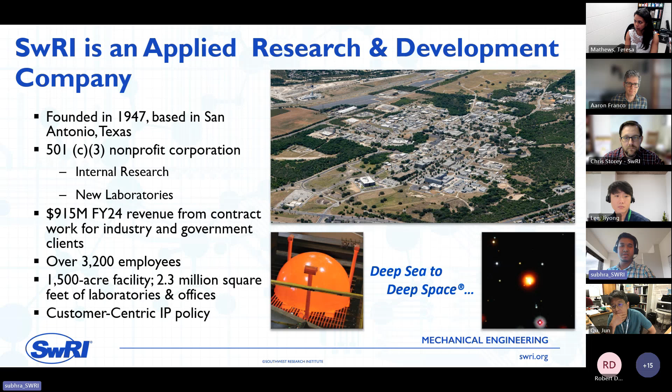We have over 3,200 employees, and we provide R&D to both government and private entities, which benefits everyone. Much like our motto, which is deep sea to deep space, Southwest Research Institute covers a wide array of topics, literally from deep sea to deep space, as you'll see through the course of this presentation.

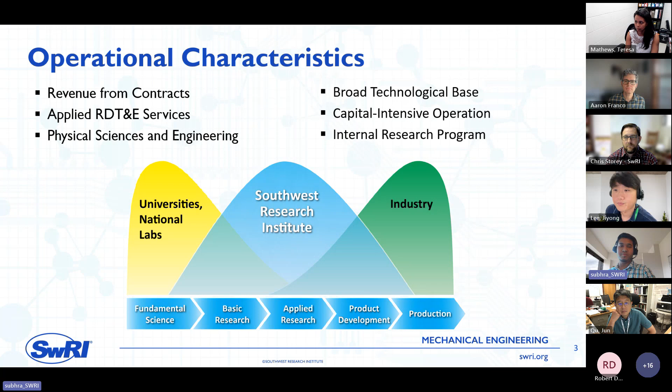I like to show this particular slide, which really portrays the niche area of Southwest Research Institute. Most universities or national labs specialize in fundamental or basic research, and industry focuses on production and product development. We come in between as a bridge between the national labs or universities or basic science and actual product development, where we carry out the bulk of this applied research.

I'm representing the machinery department, so let me give you a brief overview. We do applied research centered around rotating machinery and their associated systems, which has applications in industrial machinery, aviation, liquid propulsion, power generation, oil and gas. We have expertise covering a wide range of topics.

We can carry out techno-economic analysis as well as design technologies, demonstrate them, build them, and also mature the products for OEMs. Our department has more than 80 staff, with 6 labs and multiple test facilities. We also have capabilities for field testing.

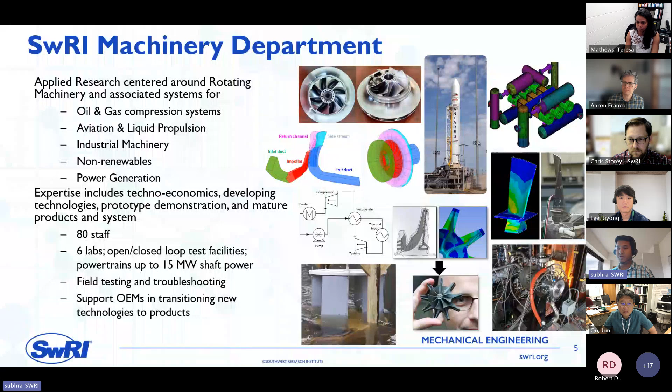This is just an overview of some of the facilities we have in our department, starting from a reciprocating compressor laboratory to a gas turbine laboratory to a centrifugal turbomachinery laboratory, as well as a multi-phase research facility. We are currently building a flammable gas test facility. Throughout all these facilities, we can operate with multiple operating fluids from air, carbon dioxide to hydrocarbons. We have a wide range of machineries from centrifugal pumps, compressors to reciprocating machines to gas turbine engines.

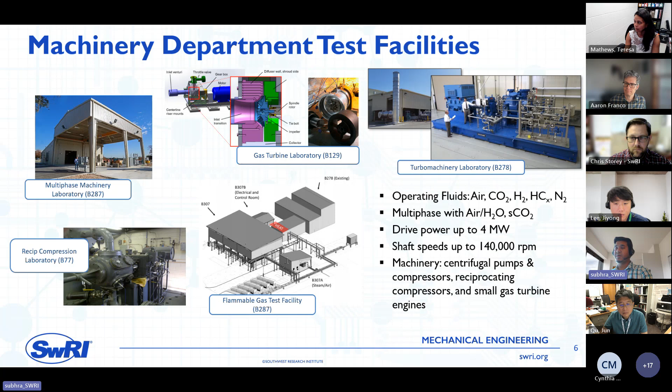Coming to the core capabilities and expertise relevant for TEAMER, we have extensive flow modeling as well as fluid structure interaction studies expertise. We can perform low to high fidelity CFD modeling as well as fluid structure interaction studies like flutter analysis, forced response analysis, or high cycle fatigue analysis.

To carry out this analysis, we have several capabilities, starting from several in-house codes to the open source NASA design codes that are available. We also have the entire suite of ANSYS, which can carry out this analysis, as well as AxStream, which is another software suite that helps in geometry generation and characterizing 1D performance.

We also have an in-house software called NPSS. SwRI is a consortium of this software, and we currently develop and are responsible for developing this software further. It has capabilities of system modeling, cycle design, as well as simple fluid thermal analysis.

Regarding the computational capabilities, we own more than 500 cores, which is not crazy high, but good enough for industrial purposes, and we can always grow more depending on necessity.

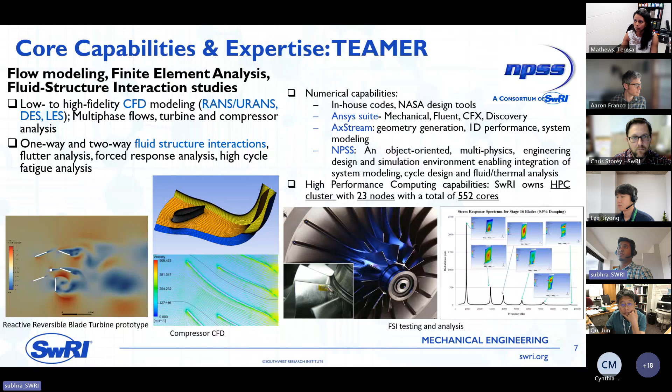Apart from the numerical modeling side, we also have extensive performance testing experience where we have carried out both field and laboratory testing. We have multiple loops, both open and closed loop, and gas turbines to carry out these measurements.

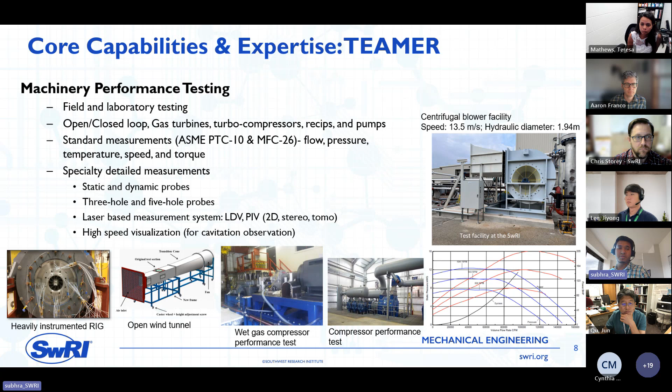We have standard ASME measurements for flow, pressure, temperature, speed, torque, anything required to completely characterize a turbo machine, as well as specialty measurements like multi-hole probes or laser-based measurement systems like laser Doppler velocimetry or particle image velocimetry, and also high-speed visualization, which can be used for cavitation studies.

One of the major USPs is the ability to create customized test setups for unique applications.

On the left is a test setup that was carried out for Aerojet Rocketdyne rotating detonation engine, and on the right we have one for space applications. So we have the expertise and experience to build custom test setups for different applications.

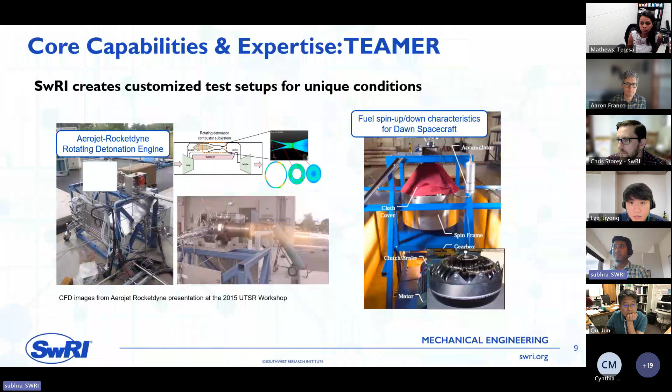To finally cap this up, I would like to showcase a recent toolset that SwRI developed, which we call Project Z. It analyzes microgrids by evaluating energy generation from different sources and also energy storage technologies to provide hourly energy balance for a microgrid. This can also be used for techno-economic analysis of individual technologies in both energy generation and storage.

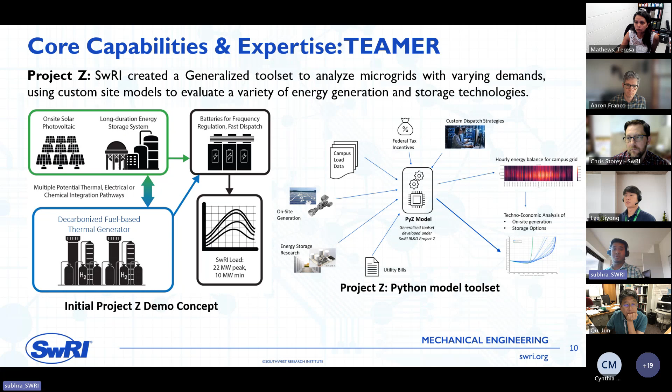Let me show some further recent works that we have carried out. Over the last couple of years, we had one TEAMER project where we carried out the numerical investigation for a reactive reversible blade turbine.

This was designed by Creektides Energy. Creektides Energy had an experimental data set for a single blade, and we validated a CFD model with that single blade result, and then built a numerical model for the different critical design parameters required for this sort of product.

Further on, we also have several other projects that we have worked on independently with both private companies as well as DOE.

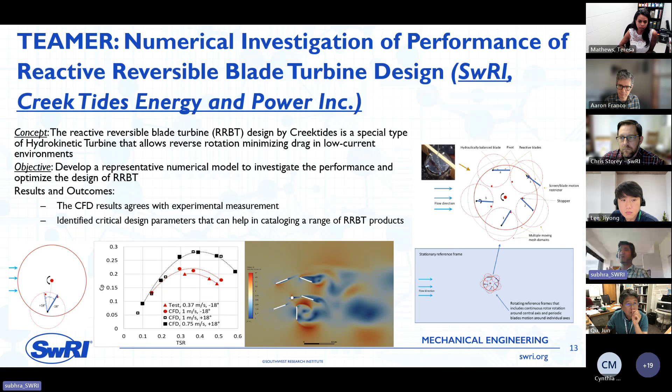This is called the Supercritical Transformational Electric Power project, which is kind of a flagship project using supercritical CO2 as the working fluid, and we are currently trying to build a 10 megawatt power plant. We have carried out both the design as well as fabrication of all the necessary aero and design components required for this power plant, and this is a project which is up and running with multiple industry and government partners.

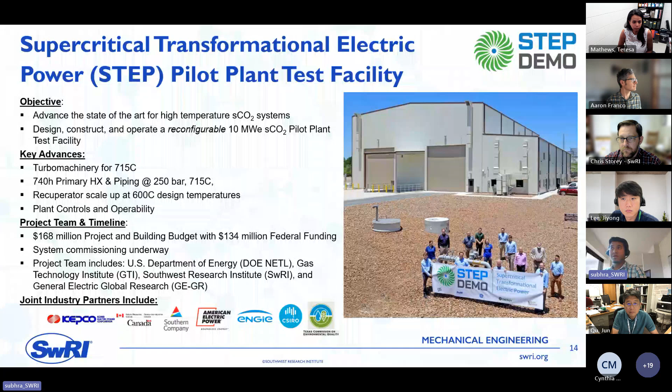Finally, to give a brief overview of some other projects, Southwest has partnered with several private industries as well as DOE offices to develop a turbo expander, integrally geared compander for Hanwha, as well as testing casing treatments for a Hanwha compressor, which increases the operating range, and also several other centrifugal compressor developments, including isothermal compression.

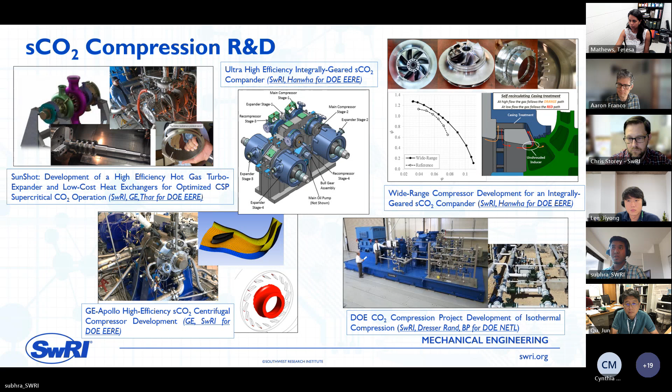We also have our footprint in several long duration energy storage projects, starting from pumped thermal energy storage to proper thermal energy storage, as well as pump hydro assessment studies and storage applications.

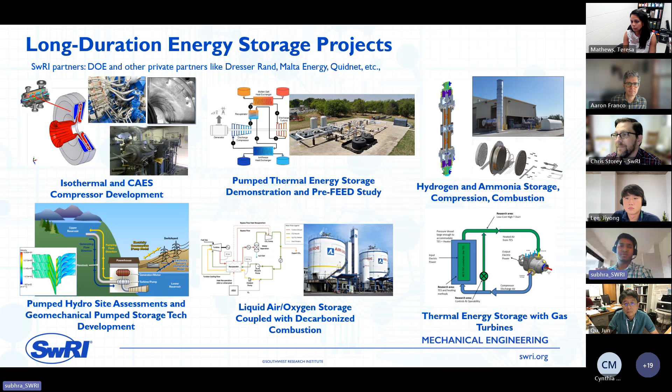Thank you. All right, so I gave a brief introduction. Again, Chris Storey, been here about 20 years, primarily on the pressure vessel side.

Just a few highlights of our department and facilities that would be applicable to this group. We have what we call the Heavy Article Test Facility, the HAT facility, in our building number 283, which has multiple cranes and large unencumbered floor space. Currently it's being used as a fabrication space, so we have plenty of subarc welders, TIG weld stations, and other manipulators inside for large items to be fabricated.

We deal with multiple metals, high-strength steels, some exotics, austenitic. That building also has a 100-ton crane inside, as well as a 20-foot cube pit capable of being flooded. As long as we put a jacket inside of it, the floor can take the loads due to the liquid.

On the lower left, the Ocean Simulation Labs is a 3-building complex, and when I say ocean simulation, it's more deep ocean, not surface or wave type tanks. We have 24 high pressure chambers capable of applying pressure to items. We do strain surveys, putting strain gauges on, even external to a feature, and exposing the strain gauge to pressure. We have protection and mitigation techniques so we can get accurate measurements from a component undergoing high stress environments.

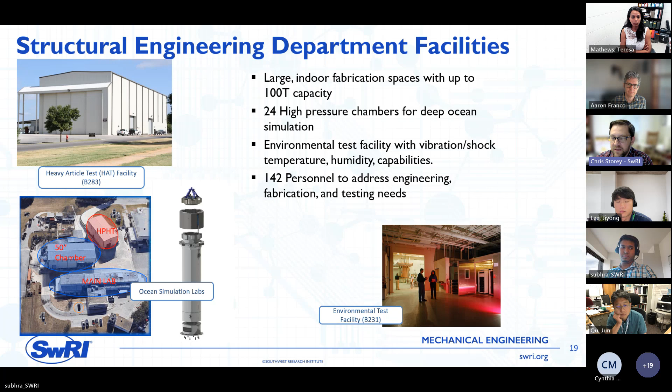Our department has about 140 plus people, a good mix of engineering staff, fabrication staff, and technicians for testing needs. Just some quick highlights as we go through.

We focus on deep ocean or even land-based pressure vessels, so plenty of folks are well-versed in the different design codes, in terms of ASME or naval ABS requirements, if those are sounding familiar.

One study we did a few years ago, probably borrowing from our department over there in Department 4, we ran a CFD for a shallow water rescue case. This was really interesting because it dealt with the rescue sub you saw on the previous page mating up to a distress sub in real shallow water. The forces involved actually aren't enough to hold a proper seal. This was one of the capabilities I wanted to show, dealing with shallow water wave hydrodynamic forces on large objects.

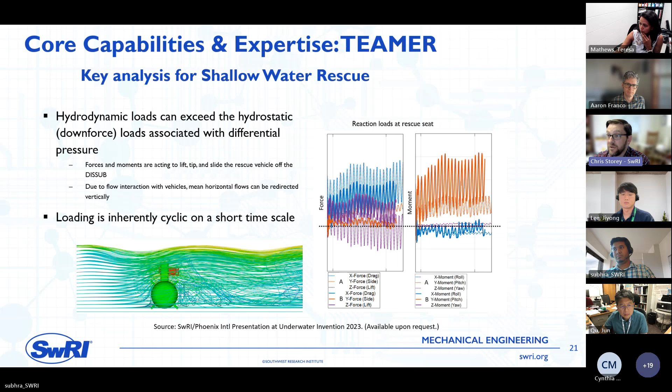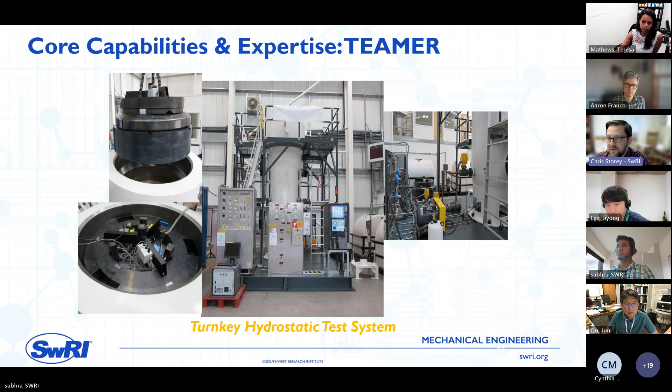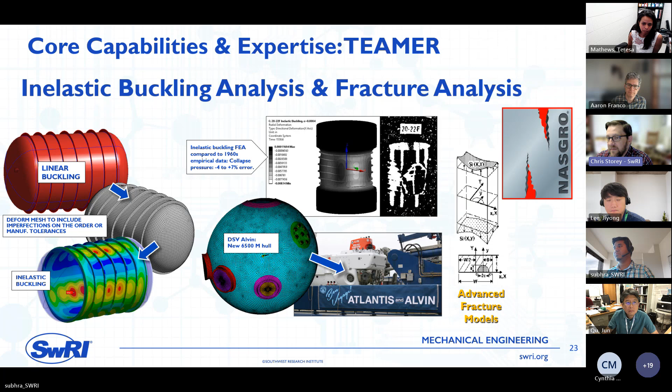On the lower right is the Alvin hull; we were involved with the personnel sphere replacement for that, and designed, fabricated, and tested the entire hull. On the far right, NASGRO is a proprietary software we provide for fracture analysis. It's been in use for several decades, and we run a licensed consortium.

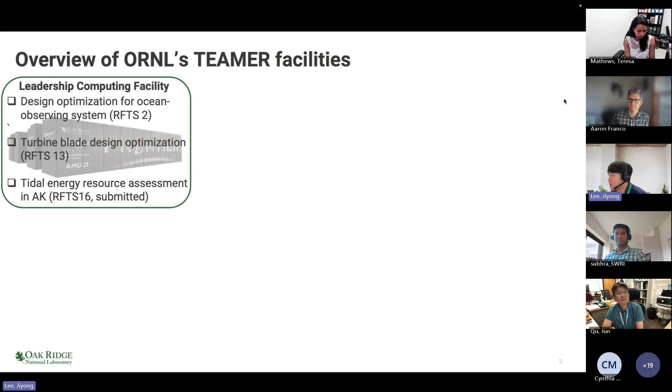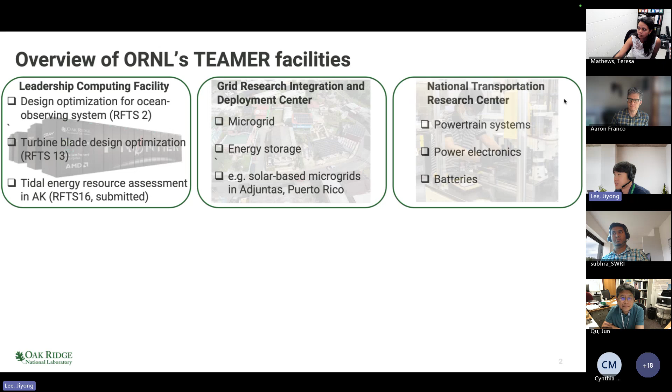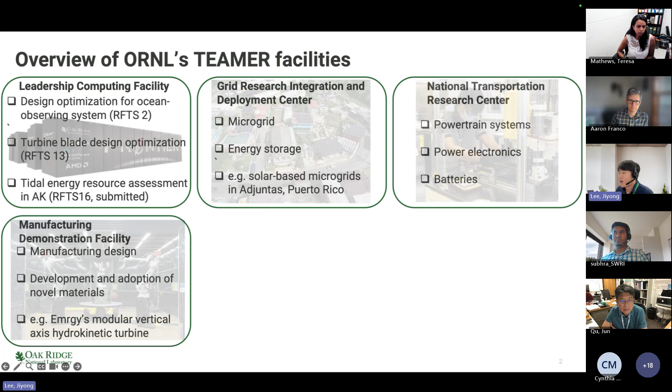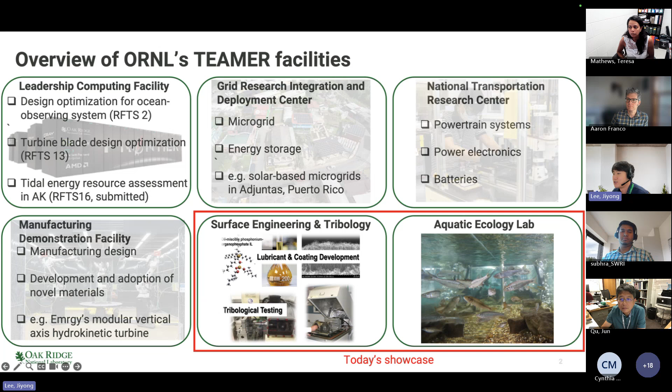Now, I will hand things over to Dr. Jun Qu and Dr. Terry Mathews, who will detail how their labs support testing and validation for marine energy technologies. Jun Qu, the floor is yours.

All right, thank you. We are glad to be part of TEAMER. ORNL has been doing tribology research since the 1980s, so it's been more than 40 years now. But we are new to TEAMER, so we're really excited about this.

For people outside tribology, they often think tribology research is primarily just doing rubbing tests to see the friction and wear. While that testing is necessary, the research truly goes beyond that. Whenever we encounter tribology issues, friction issues, wear issues, we always do tribological system analysis first. We need to understand the failure mechanism, the wear modes.

The technique we use is a combination of contact interface modeling and materials or surface characterization. With that, we can truly understand the interface phenomenon—what's going on, why it's not working, where the trouble source is. Then, after gaining the fundamental understanding, we can come up with proposals for different mitigations.

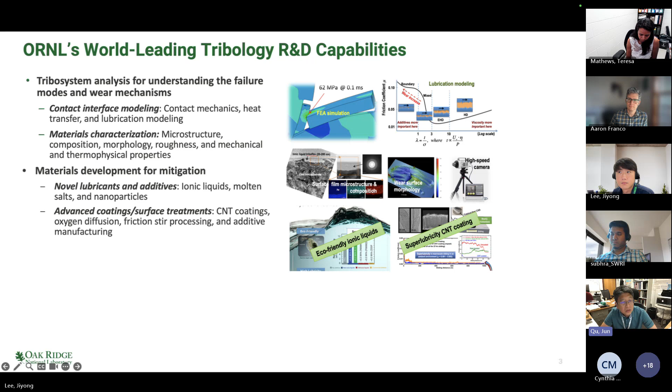Mitigations could be either from the design side or from the material side. Here at Oak Ridge, we have expertise in developing new materials, whether from the fluid side—new lubricants—or from the hardware side—new coatings, new surface treatments. Sometimes we bring new materials from both sides and seek synergy between the new lubricant and new coatings to solve the problem in a better way.

After selecting candidate materials, we do bench scale tribology testing. To make the testing meaningful, we have to match the wear modes between our lab testing and the actual application. We could simulate abrasive wear—either 2-body or 3-body abrasion—sliding wear, fretting wear, or we can simulate rolling contact fatigue, normally experienced by gearboxes and bearings.

Not only the wear mode, but also we need to do the best job we can to simulate operating conditions using our tribometers—controlling the gas environment, temperature, load, speed, and also the lubrication regime.

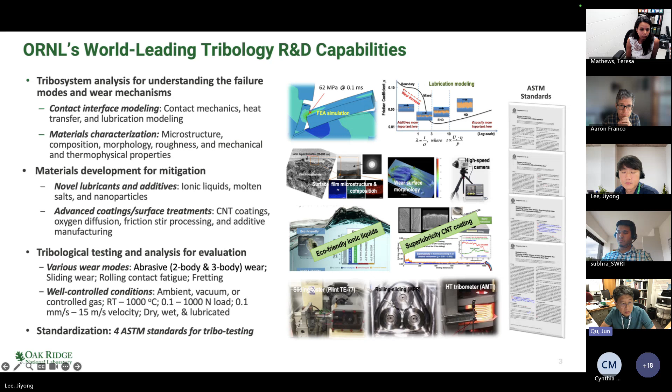And we constantly work with ASTM to establish new standards for tribo testing. Over the years, we've already established 4 of them, and they are widely used in the industry.

Then after testing, the job is not done yet. We have to understand why the new materials either work better or worse compared to the conventional. This comes from fundamental investigation through surface characterization, which ORNL has the best facility for. We do a lot of things including surface topography, roughness, and surface energy measurement, and also mechanical properties like hardness and modulus, and of course microstructure and composition analysis using SEM, TEM, XPS. Then with the combination of that information from the surface characterization, we can understand the rationale.

What's the next step? Whether the mitigation we propose truly outperforms the conventional, and how do we improve further. So that's the strategy we normally take.

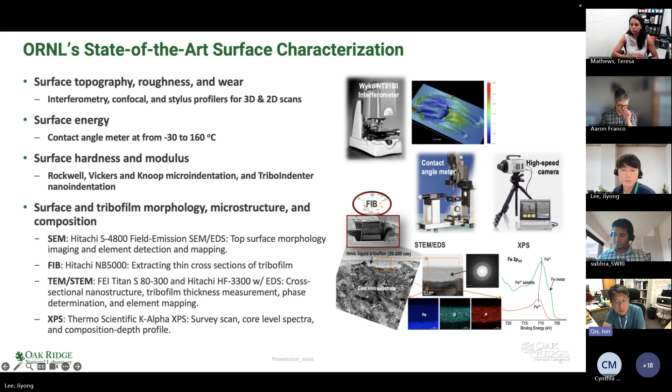Quickly, an example success story from the last few years. We've been developing eco-friendly lubricants since 2018, and in the last few years, one focused application has been marine energy, specifically tidal turbomachinery. That contains a gearbox lubricated by gear oil, but the current gear oils are toxic to the environment. So we are trying to develop a new environmentally friendly lubricant for the marine turbine.

First, we worked with the SwRI team from Sandia to gain understanding of the gearbox gear oil requirements from both the tribological and environmental perspective. Then we worked with in-house chemists to synthesize new lubricant additives. We conducted tribo testing and surface characterization to downselect the top performers. Then we worked with Terry's group in the Aquatic Ecology lab to conduct marine toxicity and biodegradability tests. With those results, we identified the best lubricant candidate.

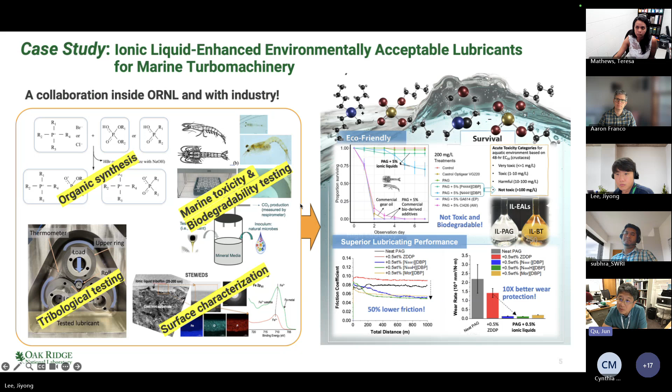Hi, thanks. My name is Terry Mathews, and I am the director of ORNL's Aquatic Ecology Lab. ORNL has a long history of aquatics research dating back almost to the inception of the lab in the 1940s. I've been at the lab for 16 years, and with a degree in oceanography, I'm going to make the case that despite being located in Tennessee, the Aquatic Ecology Lab has some unique attributes that make it well suited for marine energy research.

The Aquatics Lab at ORNL is a unique aquatic research facility located at Oak Ridge National Lab in Oak Ridge, Tennessee. It's one of the few aquatic research facilities in the region and includes 9,000 square feet of floor space consisting of flowing stream mesocosms, banks of aquaria, and large tanks for various aquatic studies. Within the facility are analytical, bioindicator, and toxicity testing laboratories that Jun just mentioned.

With the analytical laboratories, we could measure things like metals with ICP-MS, HPLC. Basically in-house, we can look at water quality issues. Then bioindicator work looks at the health of different organisms, and toxicity testing, as Jun mentioned, looks at the impacts of different technologies and chemicals when they enter the marine environment.

Adjacent to the facility are 6 quarter-acre research ponds and 2 nearby treatment ponds that can also be used for research. The facility uses a state-of-the-art water treatment system to bring dechlorinated water to the experimental tanks and mesocosms, which can be used for algal, invertebrate, and fish studies. We also have the capability to pump natural stream water from local streams into our facility and conduct experiments which add chemicals or contaminants into flow-through systems, because of a state-of-the-art water treatment facility which receives our water after it flows through our tanks.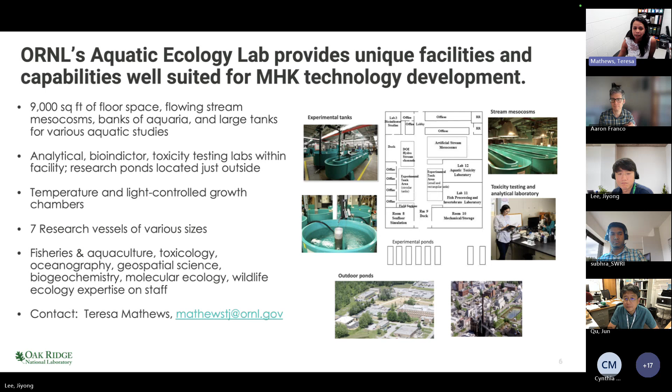We just celebrated the 40th anniversary of our long-term biological monitoring program in the Aquatics Lab, focused on understanding how DOE activities are impacting aquatic biodiversity. A key focus of this program has been species detection and quantification, which is one of the key ecological focus areas for marine technology development. Here I'm going to highlight three partnerships with industry partners where we've developed technologies for species detection using novel technologies that may be of interest to the marine energy community.

Traditional monitoring includes just going out and listening for birds, and if you work at a government lab, that's usually between the hours of 8 and 5. A lot of these birds don't call at those hours, so we've developed techniques that allow for the long-term deployment of acoustic monitors.

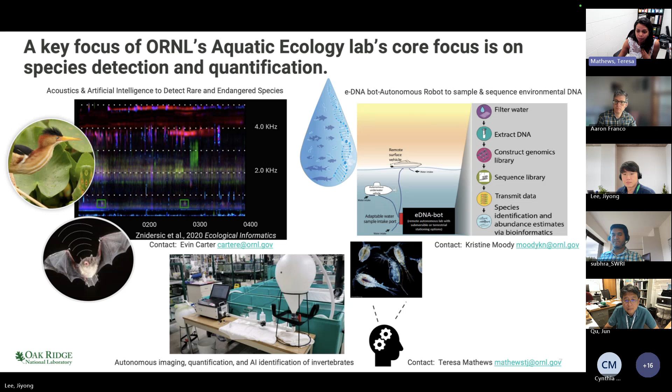But this is actually very time consuming, and the skills that you need to identify these things down to species is an art form that is quickly being lost. So through things like the eDNA-bot, which uses genomics data, and things like imaging and machine learning, we can increase our throughput of sampling in areas and over periods of time that we wouldn't be able to do using traditional monitoring. If you're interested to hear more about that, my email address is located at the bottom of this slide. So here are two examples.

So another key focus of the Aquatic Ecology Lab is on examining water quality and risk. Jun mentioned this collaboration that we have looking at the toxicity and biodegradability of lubricants—this was another collaboration with industry. The Aquatic Toxicology Lab is equipped with all of the standard aquatic ecology and toxicology equipment to look at the health of organisms over time.

In the example that Jun had mentioned, we looked at the toxicity of novel chemicals, novel lubricants that he was designing in the lab. And so we were able to look at what are the impacts on marine organisms.

One of the other metrics for whether a lubricant or another contaminant is eco-friendly is how quickly it degrades in the environment. So we looked at the biodegradability of these compounds in chambers by putting an inoculum of bacteria, a microbial community, into the chambers, and then looking at how quickly the microbes can degrade that material. In this way, we can use standard methods, ASTM or EPA methods, to look at these things, or we can develop new methods as we do in the lab routinely.

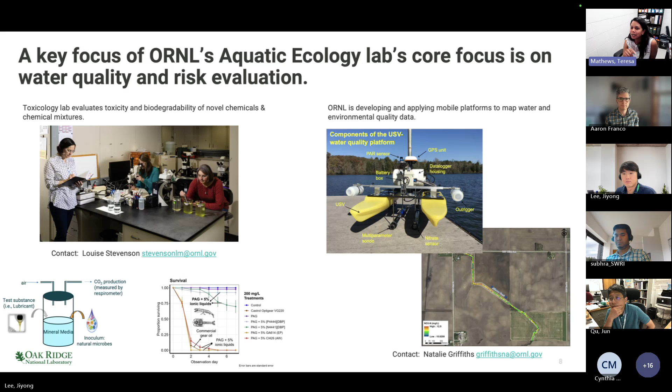So these are just a few snapshots of industry partnerships that are relevant to marine energy technologies. If you have a technology that you'd like to further develop and would like to explore working with us, I think that all of our contact information is in the next slide. I'd be happy to take any questions.

Sometimes it takes a little bit to formulate our thoughts, so I'd like to give people some time to think about that, but I just had a question. Say someone would like to work with you, what would you recommend they do to make that start of the potential partnership as fruitful as possible?

I think all of our collaborations really just started with a conversation, just reaching out: hey, this is what I'm developing, do you have any applications for it? All of the examples I showed use techniques or tools and twist them in different ways because we're working in a different context. Jun's technology was used for a different purpose, and we repurposed it for the marine environment. So if you have something you're developing and want to explore adapting it to the marine environment, it's really just a conversation, and we can figure out how to make that happen.

I don't think I have to add anything to that. It's kind of the same, it needs to start with a conversation. If someone has a technique, or an idea with some certainty, they can reach out to us to get further analysis, and we can do that kind of stuff.